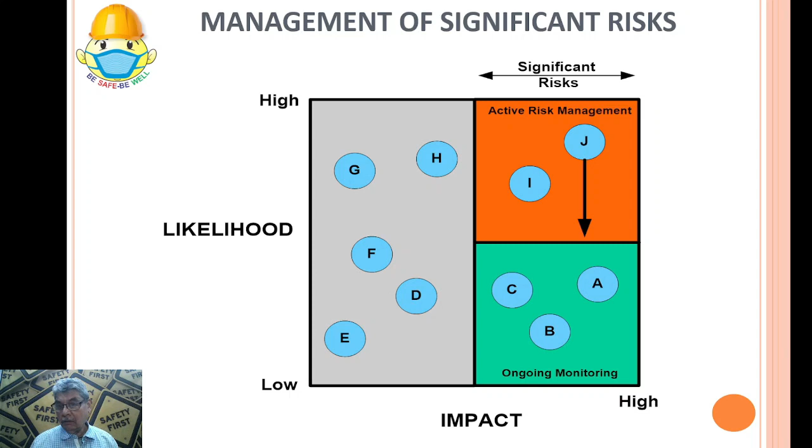And there is an area where the impact of the consequence is high, but the probability is low. Even these areas are also a matter of concern, the fourth quadrant. And so there has to be ongoing monitoring for such types of risks. Okay.

So what is the methodology of risk management? Regardless of the type of risk, there is a single approach or methodology that can be used to manage the risk. A common approach has to be taken by all. What are the key stages of this approach? We have already discussed at length in the previous discourses that the first step is identify the hazards. Second step is assess the risk.

Third, eliminate the hazard if possible, or eliminate the risk if possible. Where this is not possible, minimize or control the risk. If you take certain action to control the risk or improve the controls, check that it is successful. Ensure that whatever actions you have taken are successful and have brought down the risk.

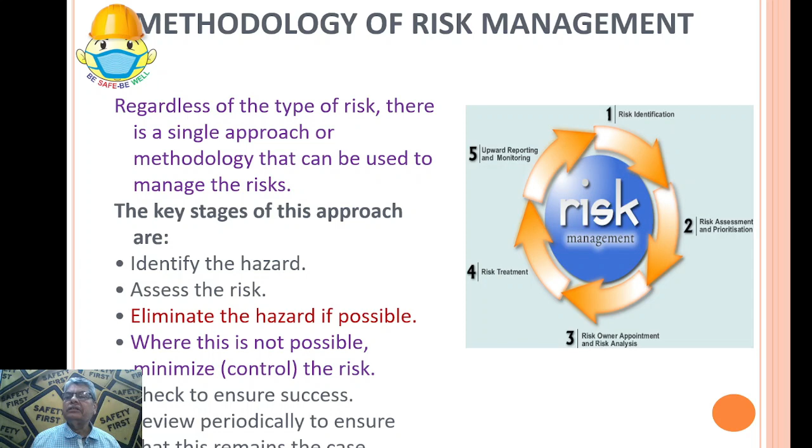That means you take the corrective actions and then everything is reported to the higher management, and higher management also takes the reviews. Then there are certain outcomes of the management review or the audits, and again it becomes the basis of the next risk assessment or risk identification. So this cycle has to be completed and it should go on. There is no stoppage. This cycle has to continue forever.

So what is the risk management process? Let us talk in detail. So first thing is, organizations should establish an effective risk management process. For large organizations where hazardous processes or hazardous machines are there, it is a must. Establishing this risk management process enables management to operate a risk-based approach. So how is the approach to all the activities or tasks which are carried out? That it is risk-based.

So that risk-based approach is there for establishing internal control systems. So you evaluate the risk and accordingly you create the internal controls. You create these controls, these systems within your organization to effectively mitigate or control their significant risk. So again the focus is on the significant risk. So this is recognized as an integral part of good management practices.

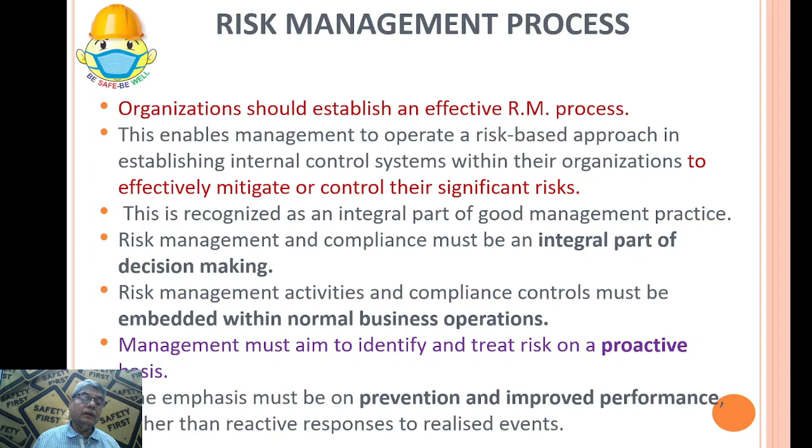What are the stepping stones of the risk management process? Firstly, try to define risk management. We have already looked into that. It is the application of policies, systems, practices and resources that minimizes risk and impact. To manage the risk, we have to create first an occupational health and safety policy. Secondly, we have to create an occupational health and safety management system. We have to create a hierarchy of controls. We have to create safe practices or a safe system of work, that is SSOW.

Competent human resource and other resources. Competent human resource is very important. And a safety culture. So these are actually the foundation or the stepping stones on which the risk management process is dependent. Over and above, there has to be a culture of transparency. Everything should be transparent. Safety is not a subject of hiding something.

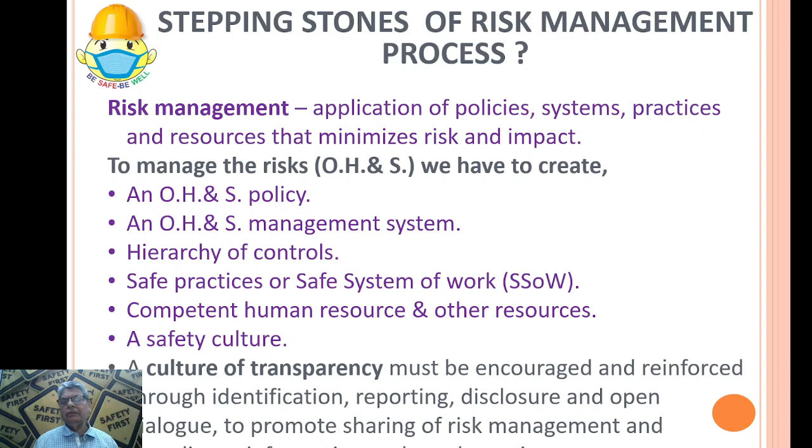So a culture of transparency must be encouraged and reinforced through identification, reporting, disclosure and open dialogue. So there has to be identification of the hazard, there has to be reporting, there have to be disclosures of what you are doing, what you have done, and there has to be continuous dialogue, communication to promote sharing of risk management and compliance information and good practices. There has to be all the time good communication, sharing of the facts and figures, information and whatever good practices you are carrying out.

Now, what is the occupational health and safety policy? Actually, in many places it is now EHS policy, but as we are not dealing with the environment, we are dealing with the occupational health and safety policy. Now, a policy is a statement of intent and is implemented as a procedure or protocol. So, it is a statement of intent and it is implemented as a procedure or protocol.

So, you must have seen the different OH&S policies of different companies. It is the smallest document. There may be 5, 6, 10 sentences in that. But its intent is very large.

Probably it is the smallest document, whatever the documents a company has, but with the larger intent. For example, when I was working with one of the pharmaceutical companies, our EHS policy was of 1 page. But the annexure to it, how we are going to achieve whatever intents we have expressed in the policy, that document was of 40 pages. So you can understand the meaning of the sentence, smallest document with the largest intent.

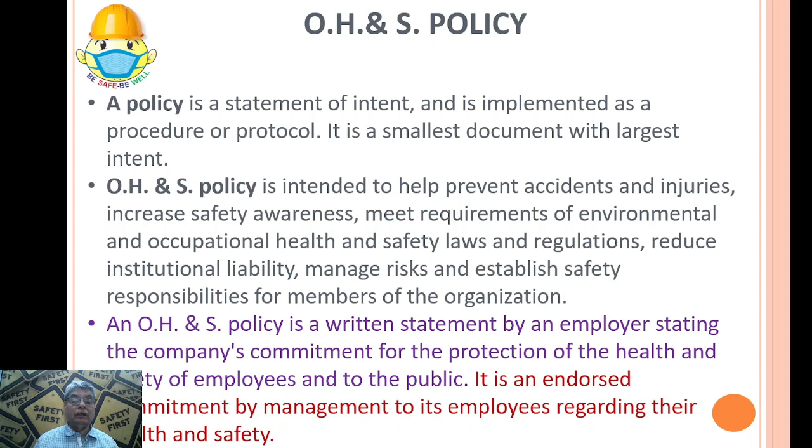So it is an endorsed commitment by management to its employees regarding their health and safety. Management is endorsing their commitment by having this policy written. So there is a sense of responsibility expressed by the management that they are responsible for the health and safety of their employees.

Now, the occupational health and safety management system is a subsystem of the overall management system, like any other subsystem such as production, HR, finance. We have the production management system, the human resource management system, finance management system, quality management system. Similarly, this is a separate management system which has to be created by the higher management, the way all these different systems are integrated and looked into thoroughly. So this safety management system is to be created, integrated and monitored thoroughly by the higher management.

Now every management system evolves because there is a requirement. Why is a production management system required? Because production is to be managed in the best manner. Why is a financial management system required? Because finance is to be managed so that there is maximum benefit from what we invest. So this evolved due to the need to ensure safety, prevent accidents and occupational diseases and safeguard the environment.

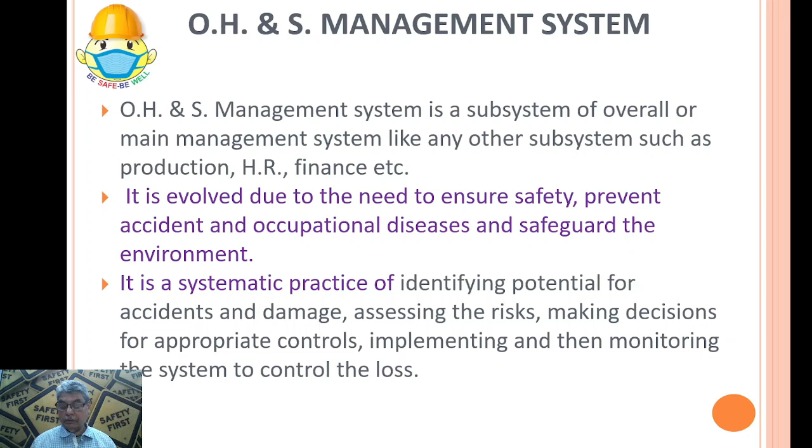Now planning is based on the various data which the management has about safety. Data comes from the audits and management review, from the investigation of accidents and near misses, and from the risk assessment. So you gather the data from all corners, observe what is required to correct things, and in alignment with the policy, you plan. There has to be alignment with the policy when you do the planning.

Then you implement. You create the implementation structure and implement it with the help of the safety department as well as the people responsible for safety in each and every department and section. So whatever is planned, that is implemented.

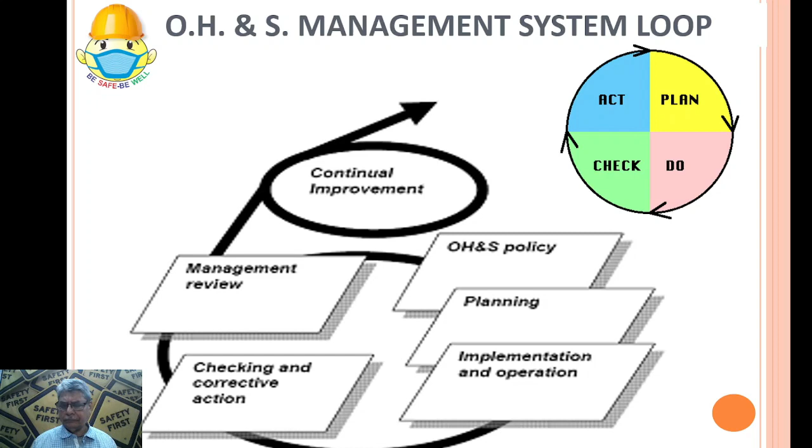Now what are the principles of the management systems? Now it is from the OHSAS 18001. So what is principle 1? Commitment and policy. That organization should define its policy, ensure commitment to its policy and management system. Principle of planning, I discussed about it, that an organization should plan to fulfill its OH&S policy, its objectives and targets. There has to be certain objectives for the safety. There has to be certain targets fixed every year for certain achievements as far as the safety is concerned.

Principle 3 is implementation and operation. For effective implementation, an organization should develop the capabilities and support mechanism necessary to achieve its OH&S policy objectives and targets. So very essentially, there has to be an organization created. There has to be creation of the capabilities in the people. There has to be a support mechanism whenever it is necessary. So this is principle 3, implementation and operation. So there has to be effective implementation.

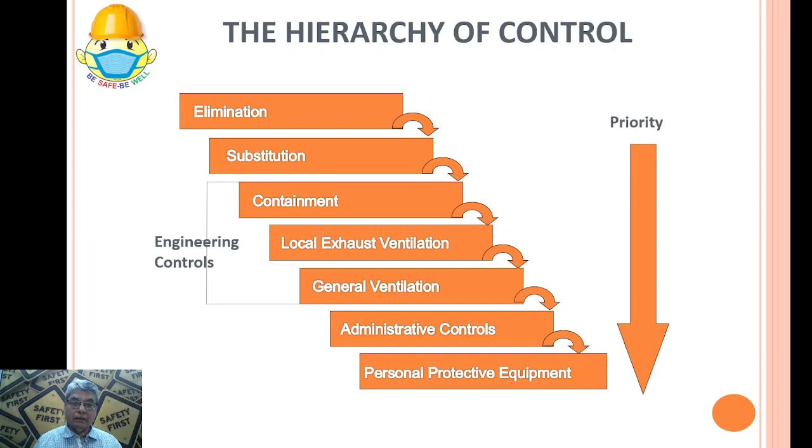So there is a need to establish hierarchy of control. There is need to establish safe system of work. What is this SSOW? A formal procedure for doing a job in a safe way, which results from systematic examination of a task in order to identify all the hazards. So it is called as job safety analysis, and you systematically examine the job or the task, you find out what are the hazards, and then you define safe method so that the hazards are eliminated or risk is minimized.

So it may include the physical layout of the task. What is the layout where the people are working, the sequence in which the work is carried out, the provision of warnings and notices, issues of the special instruction, provision of safety equipment and adequate safety precautions. So it combines the study of materials, people, plant, equipment, task and environment.

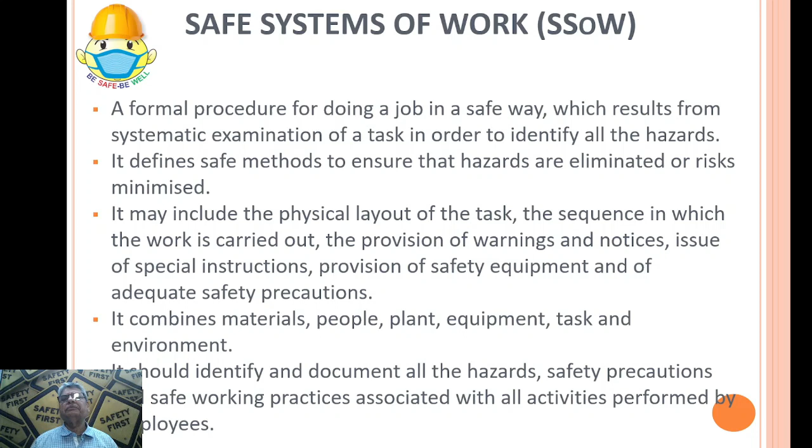It should identify and document all the hazards, safety precautions and safe working practices associated with all the activities performed by employees. We will look into safe system of work separately and in detail. So all these, PPE regime, your work permit regime, LOTO regime, all these regimes are part of the safe system of work, but we will look into it in detail afterwards.

Now, where this safe system of work is highly preferred, generally all maintenance and cleaning operations, because it is not a regular activity and there may be some lurking hazards when you are doing the maintenance. So maintenance and cleaning, electrical isolation, electrical testing, working on the roofs, use of hazardous materials, lifting and handling of the materials, cutting and welding, that is hot operations, confined space entry and contractors activities or the people of the contractors which are moving around on your factory premise and working there.

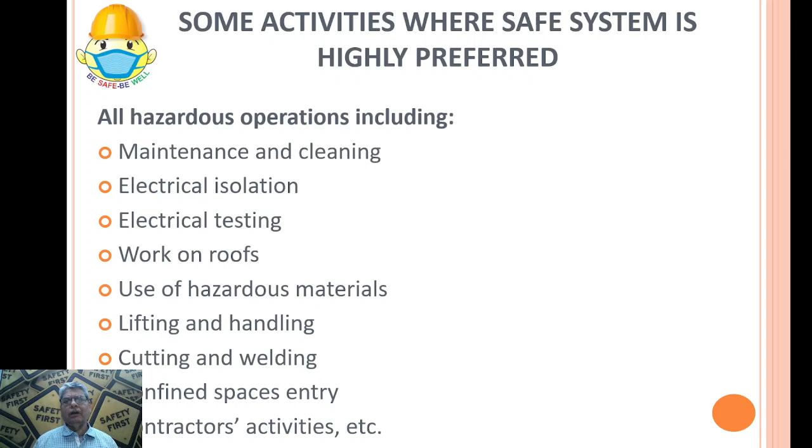So in all these activities and maybe some more activities, the safe system of work is needed, because you cannot have the standard operating procedure for this. For regular production operations, you can have standard operating procedures, but these are the operations where standard operating procedures are not possible. So here you have to create the safe system of work, taking into account the job safety analysis and whatever the hazards you find out.